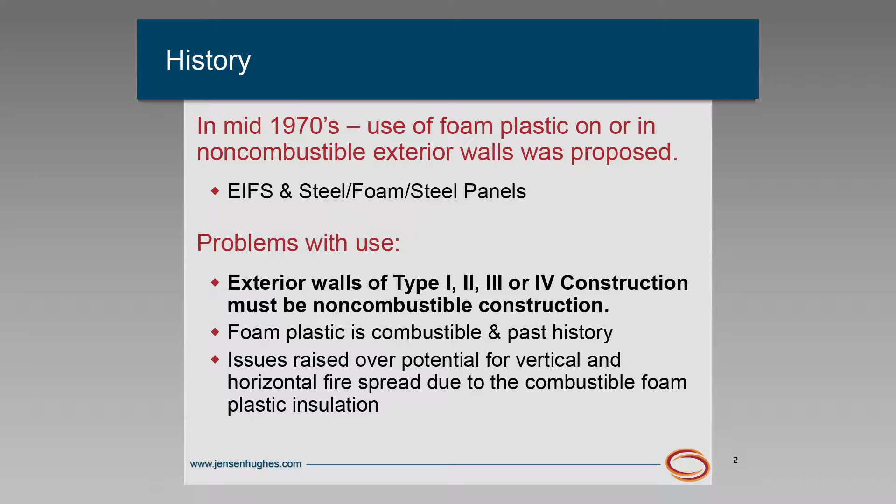Two industries, EIFS and the metal panel industry, wanted to start putting foam plastic on exterior walls to increase the energy conservation for buildings. The problem was, coming out of the late 70s, there was a Federal Trade Commission consent agreement with the foam plastics industry over the flammability of the foams. And so initially, the code officials were not buying into the concept at all. We had to develop tests to be able to show the code officials that for the walls we wanted to install the foam on, which is types 1 through 4 construction where code requires non-combustible wall assemblies, that you could do it.

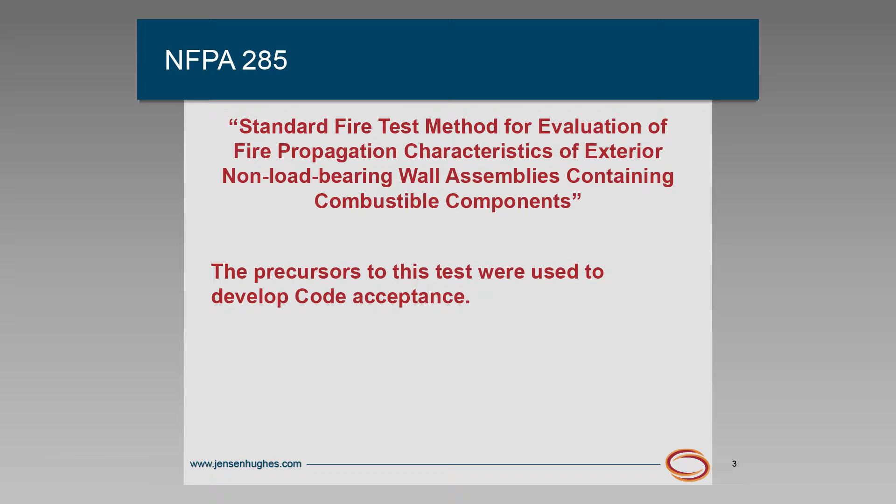And to do that, we had to develop a test. So what you see today in the code, NFPA 285, is a test that came out of a generation of tests to look at this issue. The precursor was actually an actual 2-story building built down in San Antonio. Walls installed on it, ran the tests, and showed that at least for EIFS and metal panels, they could pass the test. Other assemblies didn't necessarily pass. We shrunk it and it became 285, and that's what's in the code now.

So 285 was originally put into the code to evaluate foam plastics. That's where the genesis of it came from. It went into the codes in one form or fashion in the late 80s. So I always like it when architects tell me this is a new requirement. Have you ever read a code from whenever?

And even though we started it for foam plastics, it wound up getting used by the combustible veneer people. The first ones really were the ACMs, the aluminum composite materials, the aluminum faced solid plastic core type veneers. Those were the next exterior veneer systems, and the code would not allow them to be used over 40 feet, so there was no way they were going to put it on a tall building. But turning around and using NFPA 285 to evaluate those veneers, they were able to do that.

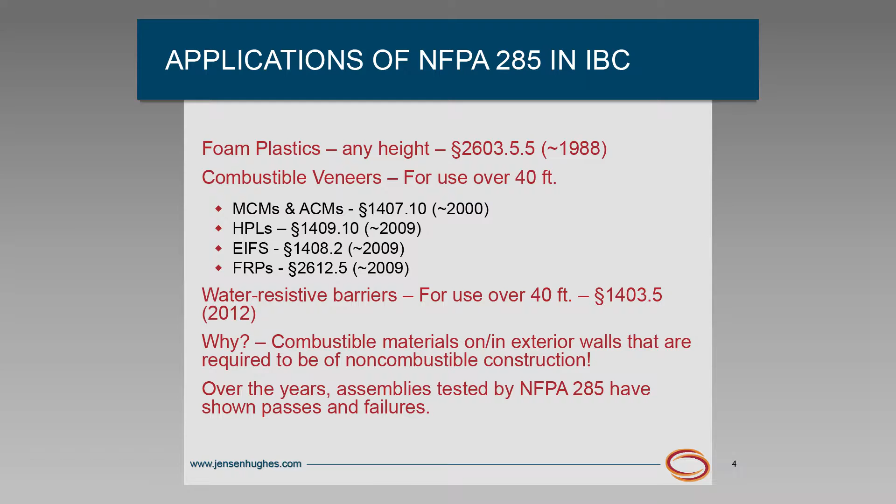So in 2000, when we brought all 3 legacy codes together under the ICC, that code change, that section 1407 I think, was inserted into the new ICC codes, and so ACMs and MCMs could then meet 285 and be used on any height wall. Same thing happened then, followed shortly by other combustible veneers, high pressure laminates, and EIFS.

And while EIFS was still regulated under foam plastics, in reality what the industry wanted to do was have their own section at the end of the day. So the technical committee really worked hard to get through ASTM several standards which could then be referenced by the code, which embodied the requirements for EIFS to include the fire testing that's required. And so then in 2009, we were able to insert section 1408 into the code, which references EIFS specifically.

Fiber reinforced plastics, same time frame. You see some of that now being used on exterior buildings.

So water resistive barriers - here we had foam plastics, we had insulation materials, and we had veneers. Turns out water resistive barriers were looked at, and in 2012 a section was added for water resistive barriers. I'll get to that specifically in a minute.

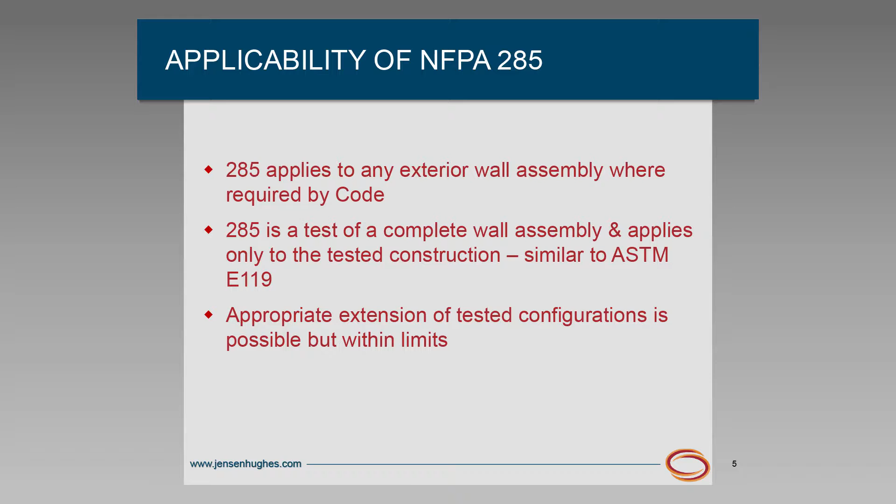At the end of the day, what we've been doing since the late 80s is we keep adding combustible materials to walls that are supposed to be non-combustible. That's sort of not what you really would like to do, but that's what we are doing. And so to make sure that you're doing it in an appropriate manner, I think that's where tests like NFPA 285 come into play.

So a couple of things about 285. You have to test an entire assembly. You just don't put a product up there and do that - you're actually testing a true wall assembly. Since it's a test of an assembly, if you're familiar with ASTM E119 fire resistance rated construction, you can't mix and match.

You maybe can, but maybe not - and that's one problem with this. You can do some mixing and matching, but you have to be within very limited limits. If I have an assembly that's been tested in 285 and I want to substitute another material, it may or may not work. Definitely, if you substitute one foam for another, it's sure not necessarily going to work. When you start adding more combustibles, you need to retest in most cases.

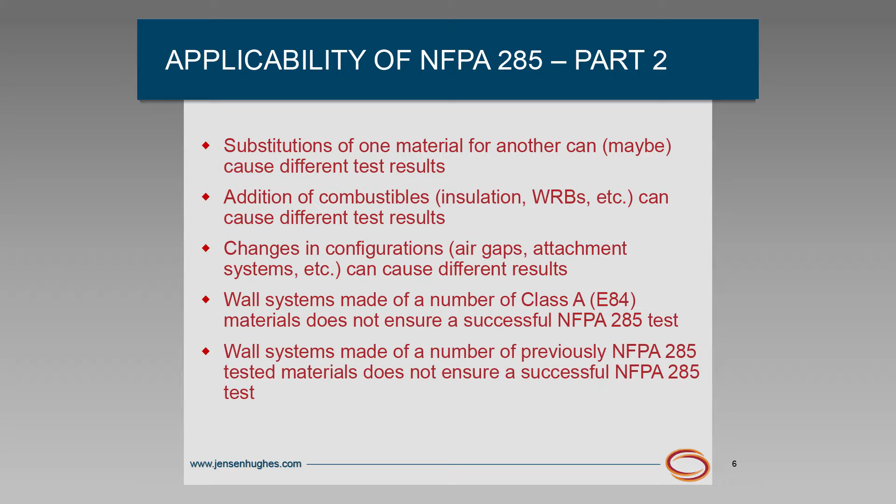So for example, many of the tests done back early on for people like the ACM manufacturers, they found that they just tested their product over gyp sheathing. Well, that was good back in 1990. In today's world, you're going to have to put a WRB over that sheathing, and now those tests they did are no longer necessarily valid because you've added new combustibles.

We found changes in configurations, again not for EIFS, but for other types of products. We have actually seen that for some products, bigger air gaps behind the veneer is worst case, but we've also seen in one veneer, smaller gap is the worst case. Who would have thought until you do the test?

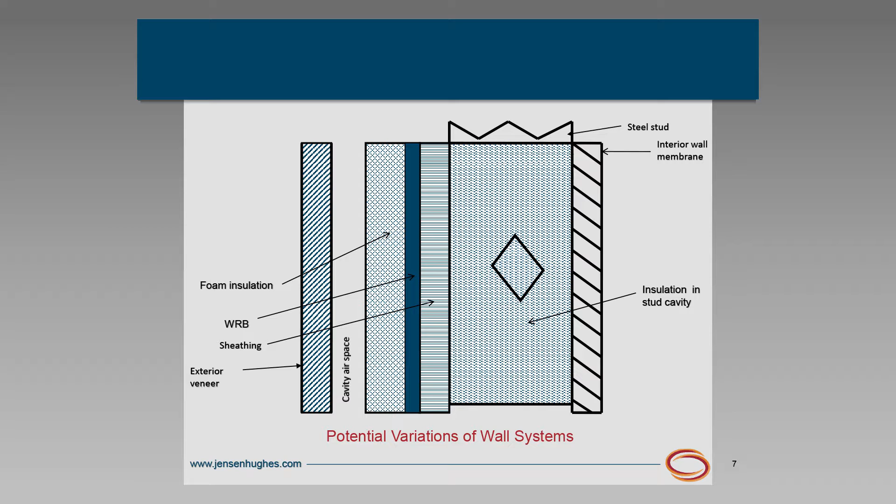So you have to be careful when you're looking at a 285 test. Somebody comes to you and says, I want you to put your water-resistive barrier in this 285 test. It's like, whoa, I'm not sure we can do that or not.

All right, so let's talk WRBs specifically. We called them weather-resistive barriers at one point, which was basically felt paper in the legacy codes from way back when. Over time, and up until 2012, there was no specification for any flammability testing of weather barriers, water-resistive barriers, as we now call them.

As I say, we now call them water-resistive barriers, but they include air barriers, vapor barriers, whatever—more than I want to know. I just deal with the fire. I don't deal with the water and vapor. I don't go there.

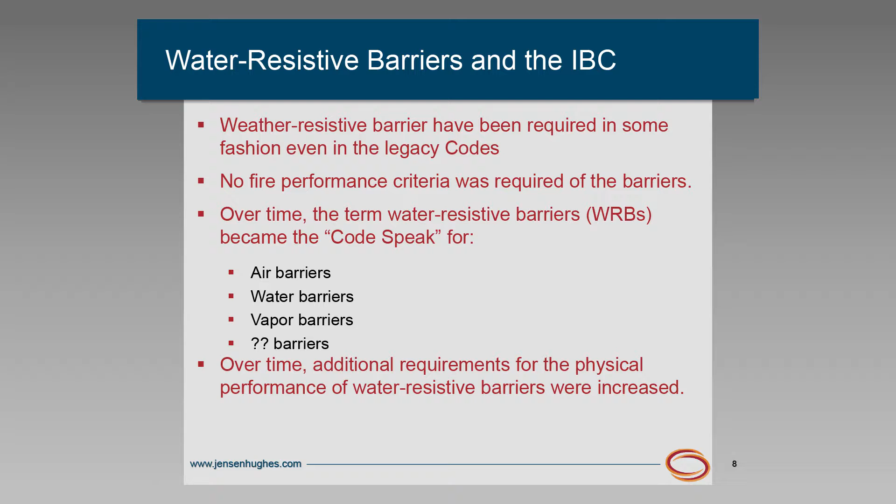Typically over time, the use of them started in Canada, and as it moved down into the States, the easiest way for people to address this issue was: well, we have water-resistant barriers on the roofs, so let's just move them from the roof to the wall. Sounds like a great idea, except we have a few problems with that.

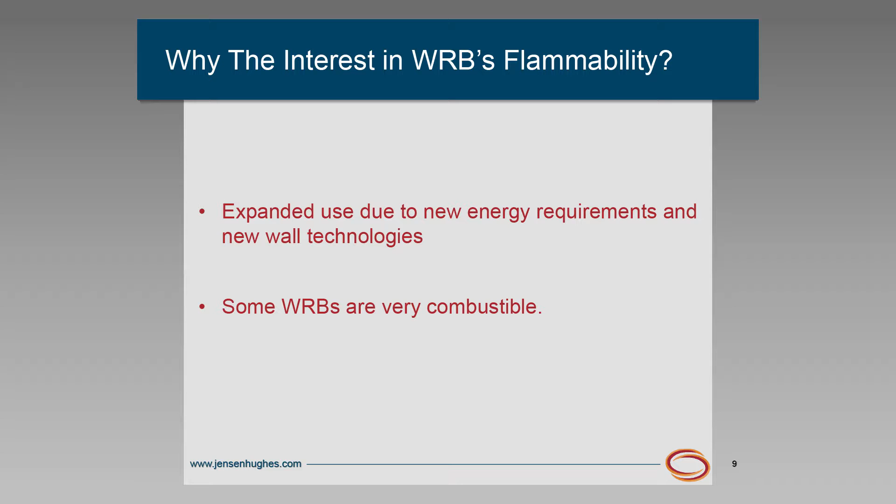One is some of these WRBs are very combustible. That was one of the big issues that drove this requirement in the codes.

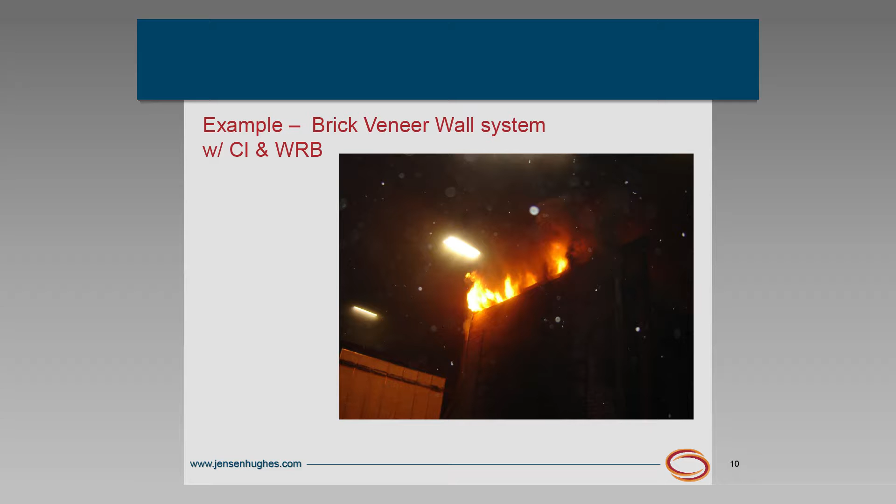An example is this NFPA 285 test, looking at the top of the wall system, which is brick veneer. What happened was we had a wall system with interior gyp, steel studs, gyp sheathing, foam plastic insulation, and a brick veneer with an air gap of about 2 inches. That system passed the test.

But you had to be careful with respect to the window header treatment, because the type of foam we were using, a polystyrene type foam, melts and comes down onto that area, and you've got to contain it—you can't let it go.

So then they decided to repeat the exact same test, except we're going to put a peel-and-stick membrane between the foam and the gyp sheathing. And so that's what you got next.

That's at about 18 minutes into a 30-minute test. All of that asphalt started flowing, burning, and went right up the wall system, which is like, holy cow.

So a couple of those types of tests are what drove the requirements for putting it into the code, to take a look at water-resistant barriers. It requires some type of testing.

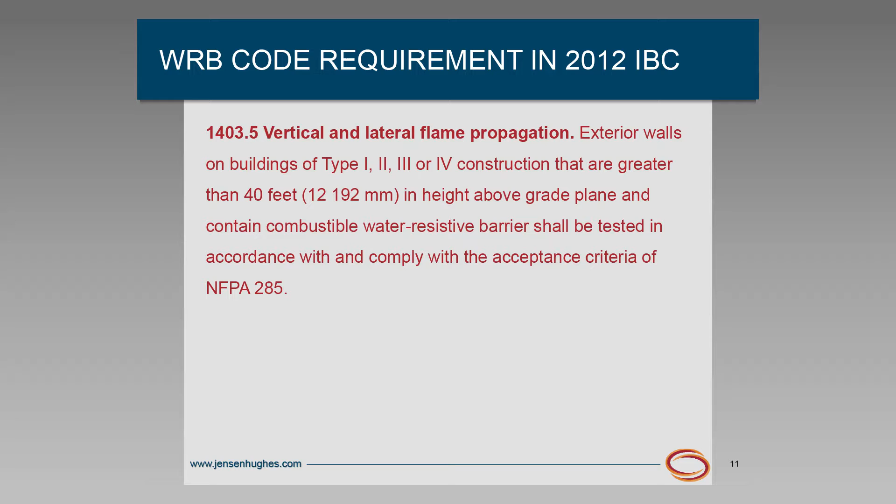So currently in the 2012 code, the basic requirement went in which said that if you're in types 1 through 4, non-combustible construction, and you want to install a combustible water barrier over 40 feet, you have to meet 285. It's the same thing we've allowed basically for combustible veneers.

Combustible veneers are always allowed up to 40 feet. After that, they were not allowed, but most of them can get through—if you can meet 285, you can do it. Same thing with the water-resistant barrier.

Why was it 40 feet? I'm old, but I'm not that old. Basically, part of that—my understanding, because I've asked that same question of the old timers—is they felt that at 40 feet, the fire department could get to it with hose streams back then, do whatever. But if it went higher than that, they were going to have problems getting people out of buildings. So they were willing to allow, basically for wood, wood sidings up to 40 feet.

And as some of this code stuff goes, it was like they picked a number. It's right about 3 stories, so they figured, okay, we can do 3 stories.

2012 had the basic requirement—you've got to do 285. Then in 2015, since we had some experience under our belts, we allowed a couple of exceptions.

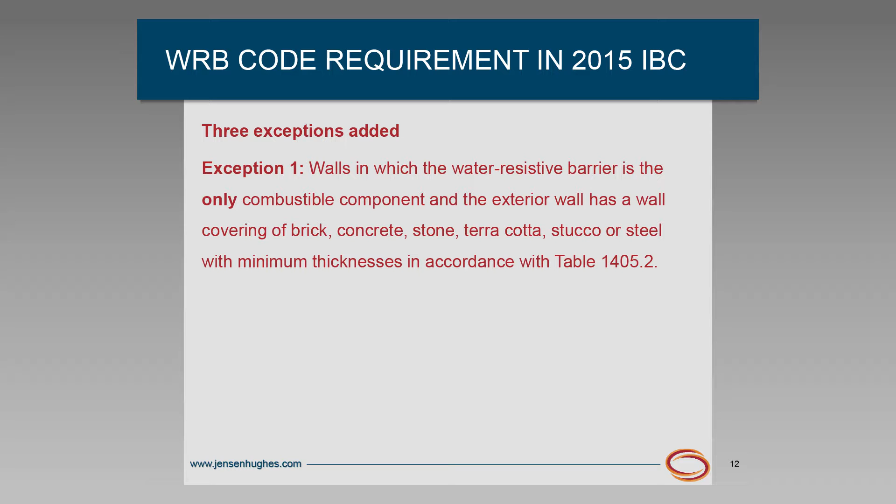The first exception is that if the WRB is the only combustible component in the wall assembly, it can be covered with what we call heavy veneers - brick, concrete, stone, those types of veneers - and not have to do a 285 test, because typically that would give enough protection to that WRB from both the exterior fire and interior fire that we have in 285, and be all right. So that was the first exception. The key is it's the only combustible.

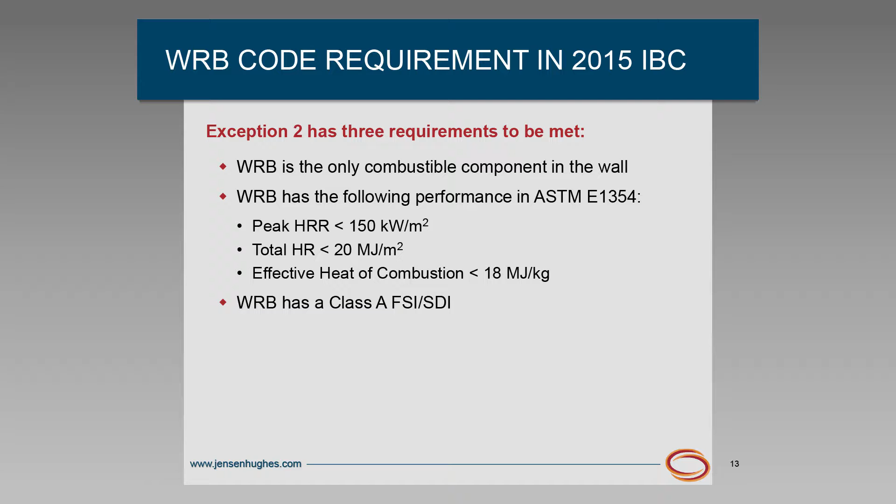The second exception said that, again, you don't have to do a 285 if your water-resistant barrier is the only combustible component, and if it meets some fire tests. One of the fire tests is ASTM E1354, nicknamed the cone calorimeter. It's a small-scale test using a 4 inch by 4 inch sample. We burn the samples and get a whole bunch of useful parameters. Basically, the code says that if it has a peak heat release rate of 150, and a total heat release and effective heat of combustion below certain values, and you've tested it in ASTM E84 and gotten a Class A flame spread rating, you can put it into a wall where it is the only combustible and not have to meet NFPA 285.

From what we've seen, the hardest part of that to pass is the peak heat release rate. I won't say how ugly it was to get to the numbers, but bottom line is that typically is a number which keeps some of the WRBs out of play here.

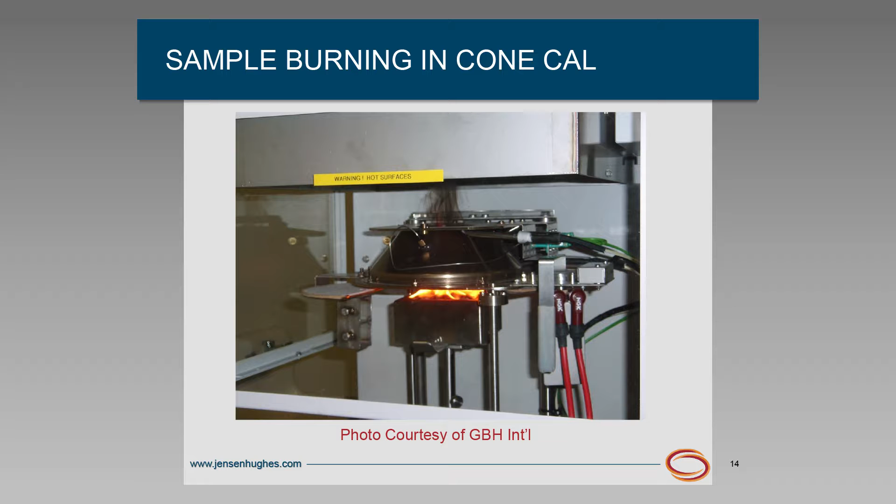So this is a cone calorimeter - a little small scale type test. The sample's horizontal. It's called a cone because right above the sample, where you see the flames, there's a little heater which radiates heat down, but the top's chopped off, so all the smoke goes up through there into a hood system. Because we know how the apparatus is set up, we measure oxygen in the exhaust gases along with CO, CO2, and the flows of the exhaust gases through the ductwork.

Way back when, it was found that for most organic compounds, for every gram of oxygen consumed in the combustion process, you get 13.1 kilojoules of heat energy released. So if you know how much oxygen is used, you can figure out how much heat's given off by the sample. The beauty of the cone is that we get a time release of heat energy output, whereas NFPA 259 potential heat, required in the code for foam plastics, measures heat of combustion - how much heat is given off by a material when it's burned in an oxygen atmosphere, squeezing every bit of heat energy out of it. That's a BTUs per pound type thing, but you don't know how it comes off - fast or slow. We don't know. So that's where the cone comes in.

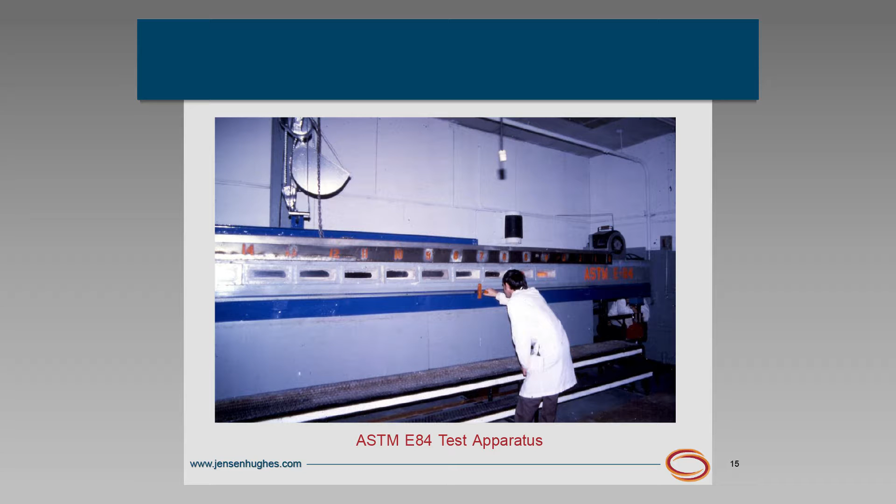ASTM E84 is the standard type test, which you all run on base coats and finish coats as a requirement. The foam plastics guys have to do that too.

So we had two exceptions. One is if you put enough heavy duty stuff in front of it, you're okay. The second is if the WRB can meet certain requirements, you're okay. And then the third exception was put in for our friends in the fenestration industry, which said, if we're putting stuff around the windows and doors trying to seal whatever, we don't want to have to test NFPA 285 for those types of products and limited applications.

From all the testing everybody's seen with respect to 285, while we have a window in there and people do special flashing and whatever around that window, we've never seen that cause a problem with respect to pass or fail. So nobody had a problem with this. But at least it specifically calls out that if you're going to use some type of butyl flashing tape or a water-resistant barrier around the openings, you don't have to meet 285.

So what about the peel and stick being in the cone method then? Yeah, peel and stick can be used there, usually within about 18 inches or so. That's fine. Just don't go start moving that peel and stick and say, okay, we're at the window, but by the way, we're going to move it up 10 feet. Anything like a foot, 18 inches around the openings is not enough to affect the performance in the test.

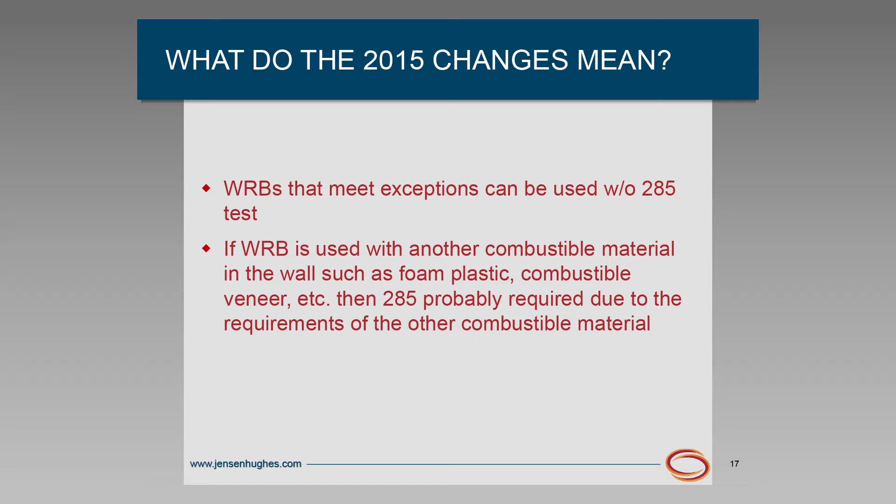Okay, so the biggest issue still remains: if the WRB is used in conjunction with another combustible material in that wall assembly, you still have to test, because that other combustible will drive the requirement for the test. So even if your WRB met exception number 2, had low flammability performance, that all looked good - if somebody's going to put an ACM panel up, it's got to be included in the test over the top of it, because the ACM is required to do that.

So, all right, I get this question all the time: I make a WRB, how do I qualify it? Well, it's not a simple process. There is no one test we can do which says you do this test, you get these numbers, you're good to go forever, no matter where you go. It doesn't happen.

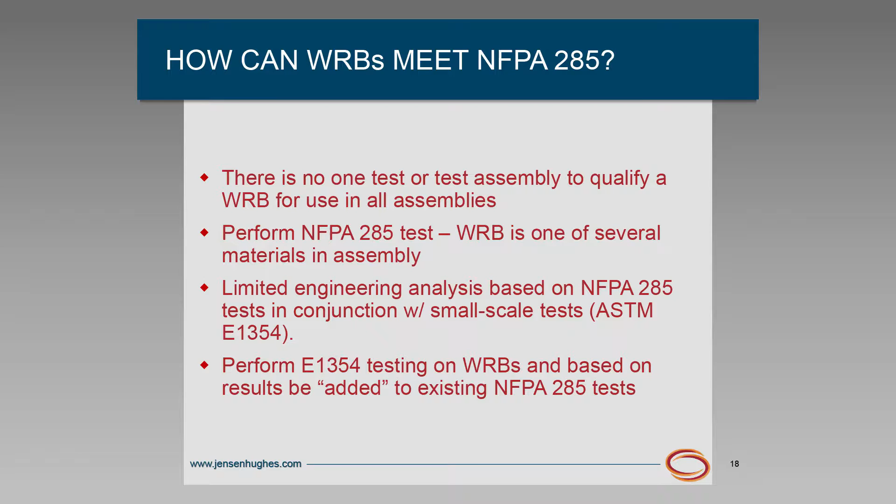One way WRB manufacturers have done this is they've gone out and actually run an NFPA 285 with one of their WRBs. Typically, if they have a range of WRBs, we'll select the worst one and test that and see how it performs, and then we can get them a limited engineering judgment based off of that.

The other way to do this is to get the cone values on your WRBs, and based off those values, we may be able to insert that WRB into NFPA 285 tests that other manufacturers have run.

So for example, as a WRB manufacturer, I go out and test my foam, or test my WRB in the cone - my numbers come back, they're nice. And then if I was to go to, I'll pick on Dow today - Dow has listings, or testing in 285 assemblies, where they have a list of WRBs that can be used in their assemblies. That's based off some baseline that Dow has done a test on. If your WRB is less than that baseline, we can add you into that list for Dow. So that's a little easier than having to totally run a 285 test.

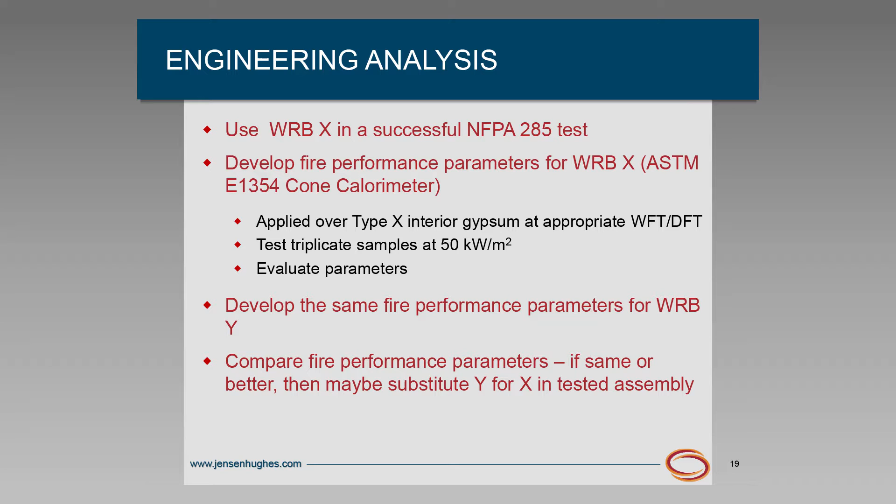So what we're going to do: you have a WRB X, it's done and evaluated in the cone calorimeter, so you get your basic properties. You're going to turn around and have that - typically some WRB manufacturer may run a full-scale 285 test with that WRB in there, and it passes. So that's a baseline for him, for that assembly, or that type of assembly - here's the baseline for a foam, for a WRB. And any of his other WRBs that have better cone performance would be engineered into their systems.

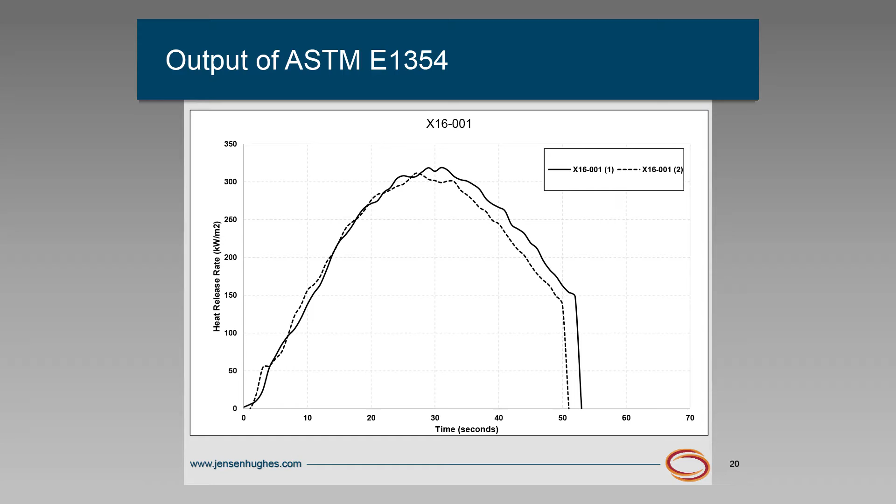This is what the output of a cone test looks like. You see ignition at the bottom left. This is for a fluid-applied WRB. You see how much heat is given off, up to a maximum of about 300 to 325 kilowatts per square meter, and then it drops off pretty fast - in less than a minute, it's over with.

This is sort of typical of what you'd see with fluid applieds. If you had wraps - Tyvek, Dow Weathermate - it would be less than 50, and the peak would probably be a little less too. And if you go with peel-and-sticks, your peaks will probably be higher and it will be extended much longer. So it just depends.

And as I tell WRB manufacturers: I know you like to sell product, but this isn't barbecue, so don't slop the stuff on there, because the more you put on there, the more it's going to burn. So keep that in mind.

Yeah, it's like, how much do you really want? Yeah, I want to put 50 mils. Oh, most people put 20. Well, yeah, but then you do the test and you realize 50 mils ain't going to hack it - you're going to go back to 20.

So bottom line is, here's what E1354 gives us - out of that plot you just saw, we get a whole bunch of data. We know when it ignited, how long it burned, what was the peak, what was the time to the peak, and average heat release rates over specific time frames from ignition out.

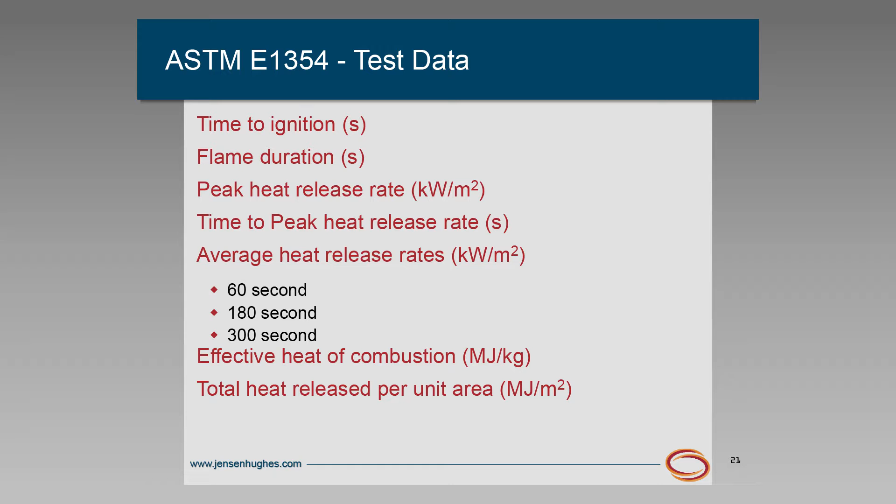We also, because we measure weight loss, can get what we call effective heat of combustion, which is different from the normal heat of combustion, because we only did it on one face of this sample under these conditions. The other important one for us is the total heat release per unit area.

So how much heat's being released per square meter or square foot up there on that wall system. This gives us some idea of being able to compare WRBs. The most important ones are the items that involve the heat release rates, the peaks, effective heat of combustion, total heat release rates. When I'm comparing that, I don't really care about time to ignition necessarily and some of this other stuff, but those are the values that we really look at.

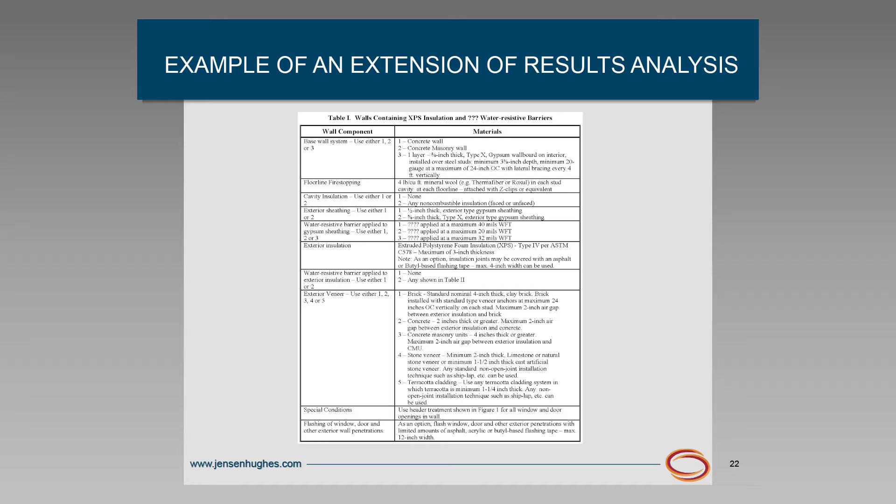He went out then and ran an NFPA 285 test, which involved foam plastic insulation, in this case polystyrene foam, and he ran it with a brick veneer. So he did that test, and based off the results, he now comes in with a whole slew of variations that you can do in the test or in the wall assembly. For example, we tested steel studs and gyp sheathing. You want to use concrete or CMU, sure, go ahead, be my guest.

But for the water-resistive barriers, when we designed the test, he had 3. We ran the cone tests on them and picked the worst. So he's got that one tested in 285, and the other 2, which had better performance, are put into the analysis just based off of the small scale tests. So he doesn't have to rerun that test all the time. And then the other limitations are what you would normally find for a 285 test assembly with respect to veneers and other things.

All right, so 285 — we have found that it's been a pretty good predictor of performance of exterior walls. And it turns out that EIFS is one of the best ones that we've had to show that. There have been probably more fires... well, we know that EIFS has been involved in fires, and EIFS, when properly installed, has performed well in a fire exactly as you would predict per 285.

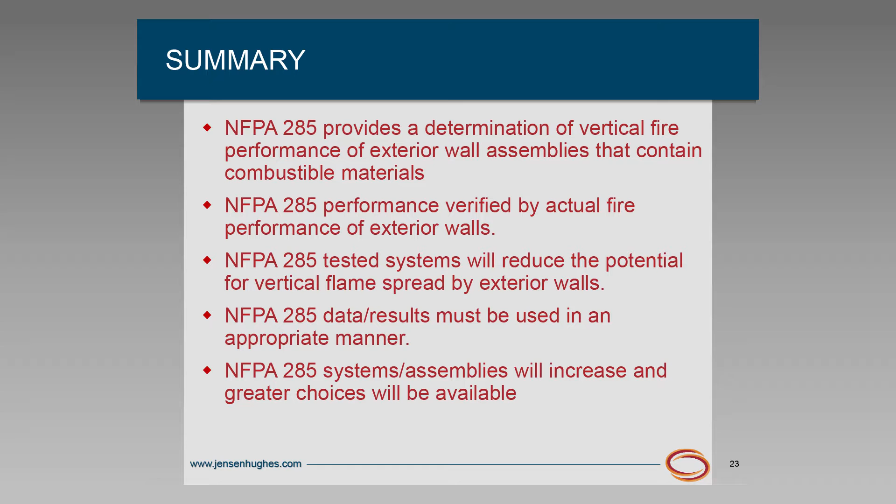We've also seen a whole bunch of fires, for example, that have occurred in United Arab Emirates, overseas. It turns out those nice towering fires are exterior veneers which do not meet NFPA 285. The 285 requirement did not enter into that area of the universe until about 2013, 2014. So all those buildings that were put up before that are all based off of E84 tests rather than 285 tests. So I'm just glad I'm not the insurance companies.

285 — the big kicker that I see is people have to realize that it's a test of assembly and has to be used appropriately. You can make changes. We get those requests all the time from architects and GCs and from manufacturers trying to say, okay, they want to do this in a wall. Sometimes we can say yes, sometimes we have to say no. It just depends.

At the bottom line, we have found, and which we never knew going into this thing — when I started working on this in 1980 was when the first 2-story outdoor test was built, and we ran the test series on EIFS and metal panels — we never thought that this is where we would be at the end of the day with all these various other components in there. But we have learned a lot.

We've learned that all foam plastics are not the same. Thermoplastics are different than thermosets. And even within a family of thermosets, performance is not the same when you put them up on walls with different types of veneers over the top of them. You get totally different results in some cases. Veneers are not the same. We have seen that even though it may be an ACM panel, for example, depending on air gaps between them, there may be a problem. We've also seen that for high pressure laminates, they're not all the same. I can't take a test of a high pressure laminate like Trespa and say, Fundermax, you want to just put Fundermax on that wall, which is another high pressure laminate.

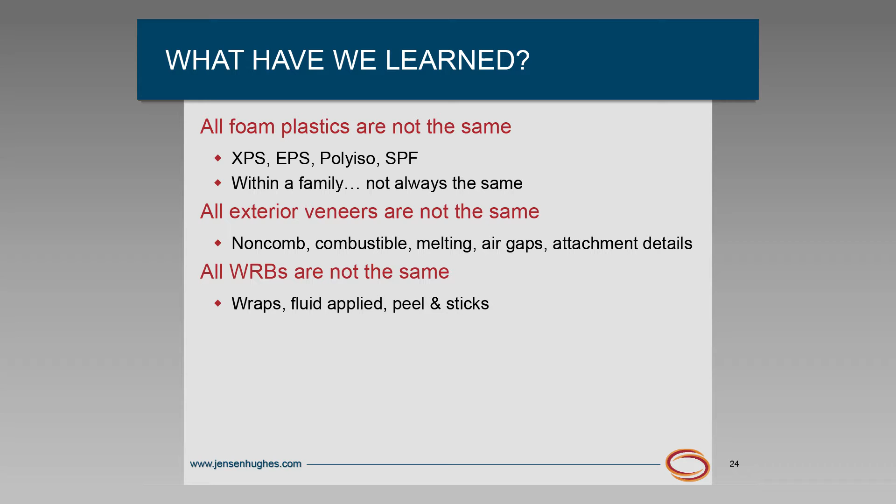No, they're just too different, so that's a problem. And we've also come to know and love that water-resistive barriers are not the same. The thinner they are, the less combustible they are, the better off you are. But as you move up into that combustibility range, they can affect the fire performance of the overall test assembly.

So at the end of the day, you don't want your product there. So with that, I'll be happy to answer any questions anybody has. Thank you.

Yes, sir. Have a list of parts that failed, that are out there, that were challenging. Nobody talks about failures. So yes, there are - I mean, it depends upon how you define fail. I'll give you an example.

Let's say I have an asphalt-type peel and stick, which we know is pretty ugly. We've seen veneer manufacturers say we're going to put 2 inches of mineral wool as the CI over that, then put our veneer over that and do a 285 test. Well, 2 inches of mineral wool protects that underlying peel and stick. So once they get that test done and get the peel and stick qualified, you can almost put anything underneath there - but you've got to use the mineral wool. I can't use EPS, XPS, any foam plastic - no, that ain't going to happen. So it depends on how it goes.